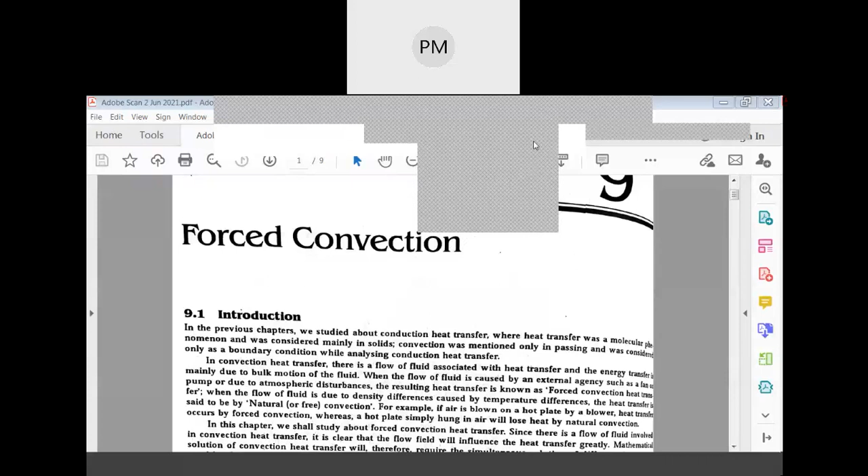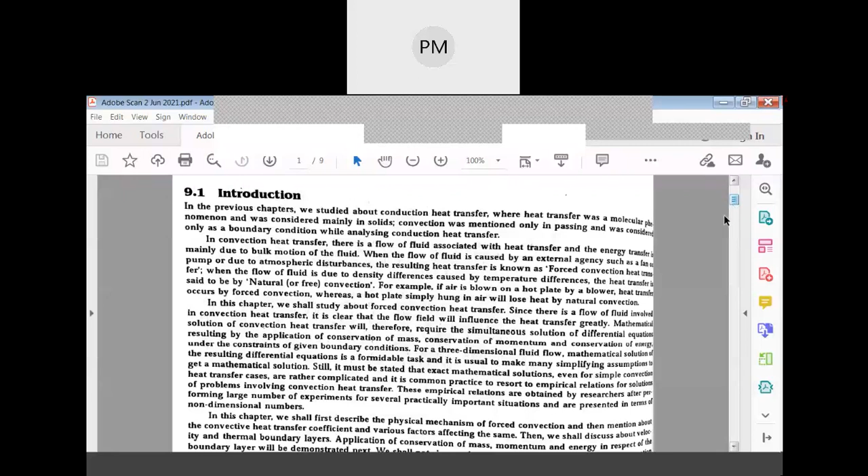So what is convection? Convection is a mode of heat transfer that takes place between a solid surface and a fluid. Here in convection, the fluid will have bulk motion flowing over the entire surface. Heat will be transferred from the surface to the fluid, or vice versa, depending on which has the higher temperature. If the surface temperature is higher, heat transfers from the solid surface to the surrounding fluid. If the fluid temperature is higher, heat transfers from the fluid to the surface. Heat always transfers from higher temperature to lower temperature.

Now, in convection there are two types: forced convection and free convection. In forced convection, we use external devices like fans, pumps, or blowers to increase the velocity of the fluid flowing over the surface. If you increase the velocity of the fluid, you increase the heat transfer, because more fluid flows across the surface and more heat is absorbed by that flowing fluid. Heat transfer is greater in forced convection.

Whereas in free convection, the bulk motion of the fluid takes place due to the density difference caused by temperature.

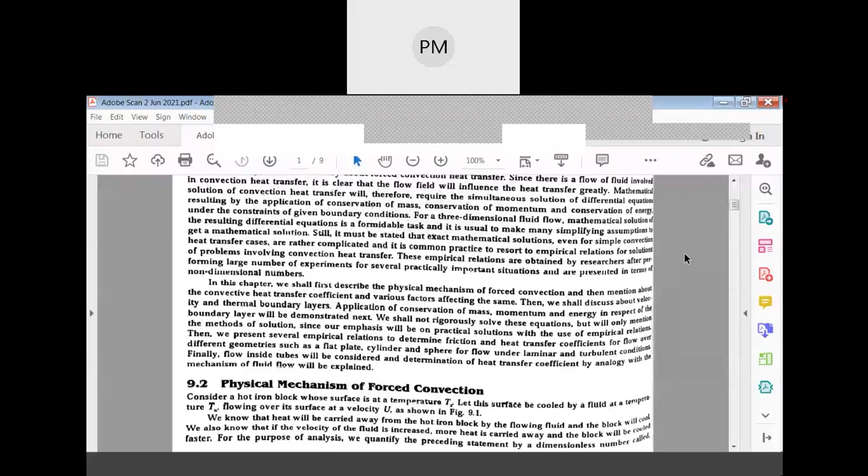For example, let us take a hot iron block which is hung in a room. If you just keep it in the air, the fluid surrounding that hot block will come in contact with it, and the temperature of the air increases. When the temperature of the air increases, its density comes down, and the hot air will try to move upwards. Again, cold fluid comes in contact with the hot block, absorbs heat, and its density decreases. Whenever density decreases, the fluid starts rising upwards. In this way, natural convection takes place.

Understood? Forced convection and free convection. In forced convection, we use external devices to increase the velocity of the fluid, thereby increasing heat transfer. Whereas in free convection, the bulk motion of the fluid takes place due to density difference. When the fluid comes in contact with a hot block or hot surface, it gets heated up and its density decreases. As the density decreases, the fluid rises upwards, and colder fluid with higher density comes in contact with the hot surface.

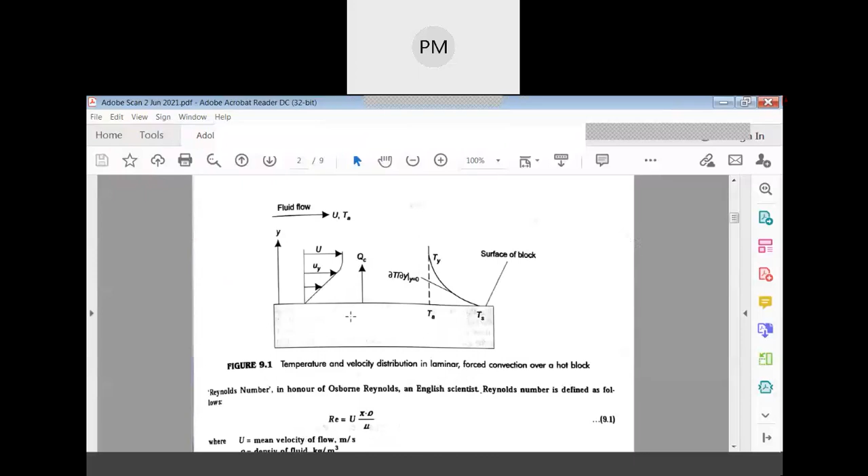Next, the physical mechanism of forced convection. First we will start with forced convection, then go to natural convection. Let us consider a hot block over which fluid is flowing. As the velocity is increased, more quantity of fluid flows across this hot surface, and more heat is transferred to that fluid.

This velocity is quantified in terms of a dimensionless number known as the Reynolds number, given by rho into u into x divided by the dynamic viscosity, where rho stands for density, u stands for velocity, x stands for characteristic dimension, and mu stands for dynamic viscosity.

So you should know the units also. Rho is the density, and its unit is kg per meter cube.

U is the velocity, in meter per second, and x here stands for characteristic dimension. This will depend on the geometry whichever you are using. If you are using a flat plate, then characteristic dimension will be the length of that flat plate.

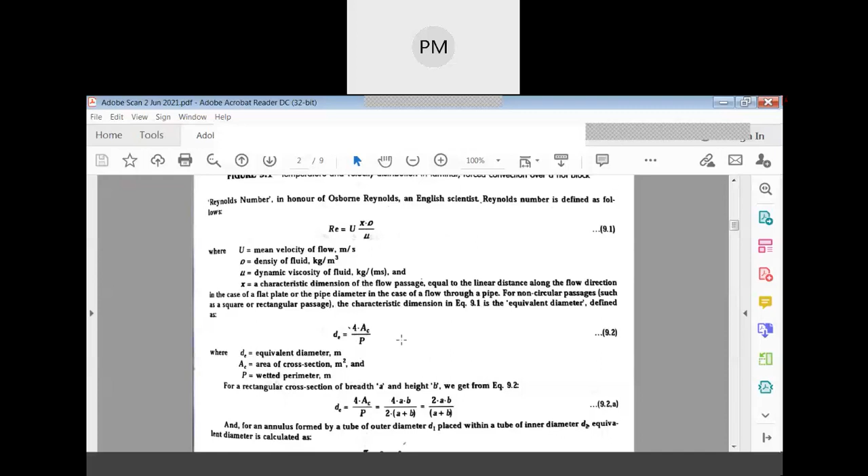Equivalent diameter we are going to use whenever it's a non-circular passage. If it's a flat plate, the characteristic dimension will be the length of the flat plate. If it's a circular pipe, diameter will be the characteristic dimension. If it's a non-circular passage, we use equivalent diameter, given by 4 times cross-section area divided by the perimeter. Suppose you take a rectangular cross-section having breadth A and height B, the equivalent diameter is given by 4 times cross-section area by the perimeter.

What is the cross-section area? If it's a rectangular cross-section, the cross-section area is breadth into height, sometimes we say length into breadth. Here we have taken breadth into height, AB - one side dimension is length A, another side dimension is length B. Then 4 times length of A into length of B divided by perimeter. What does perimeter mean?

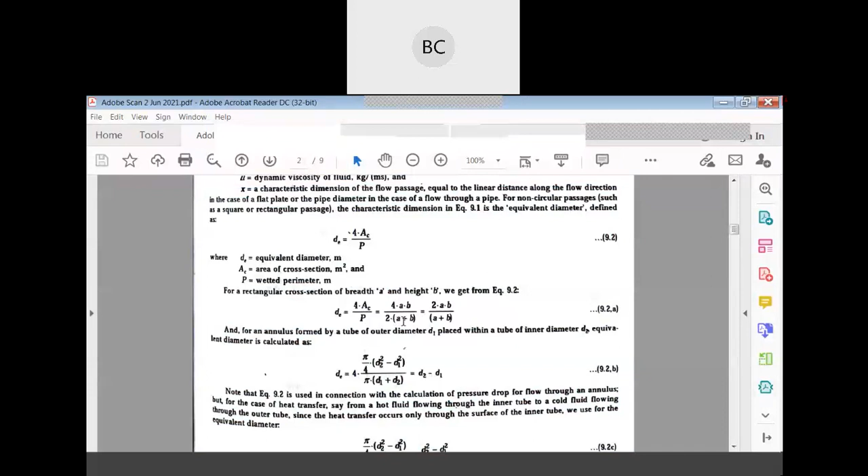Okay, if you just simplify, it will become 2a times b divided by a plus b.

Now, if you want to find what is the equivalent diameter formed by the annulus of the outer diameter and inner diameter. Suppose there are concentric pipes - that means one pipe inside another pipe, which we call concentric pipes.

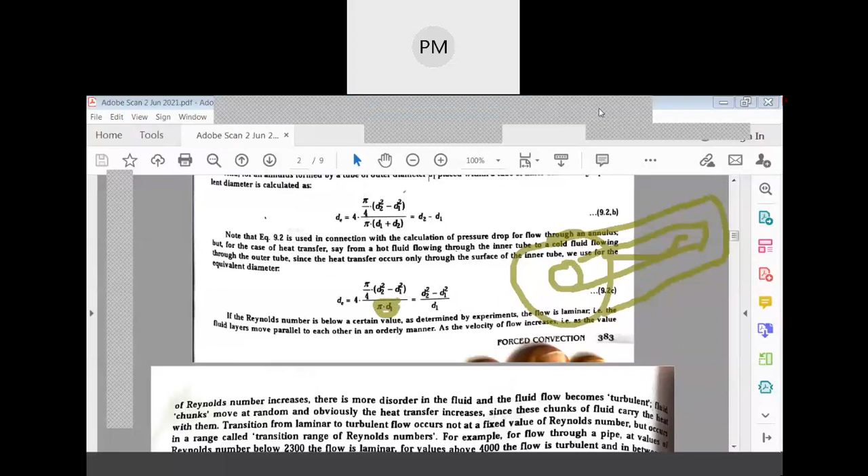Then the equivalent diameter is given by 4 times. We have to take the cross section area of the outer pipe minus the cross section area of the inner pipe, that is the difference. Then here, heat will be transferred from the inner pipe surface, that is why we have taken only pi times d1. If you simplify this, you get d2 square minus d1 square by d1. This is how you find the equivalent diameter.

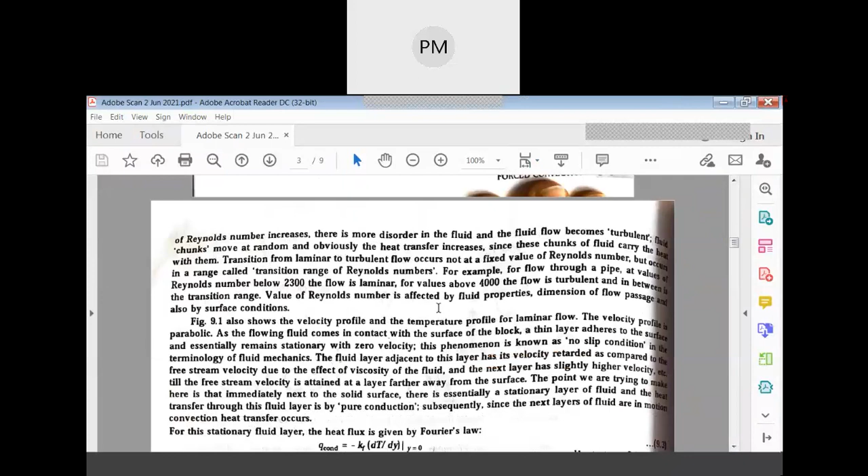Now regarding Reynolds number - if you take a circular cross section, just flow through a pipe, then for Reynolds number below 2300 the flow is said to be laminar, whereas above 4000 the flow will be turbulent flow.

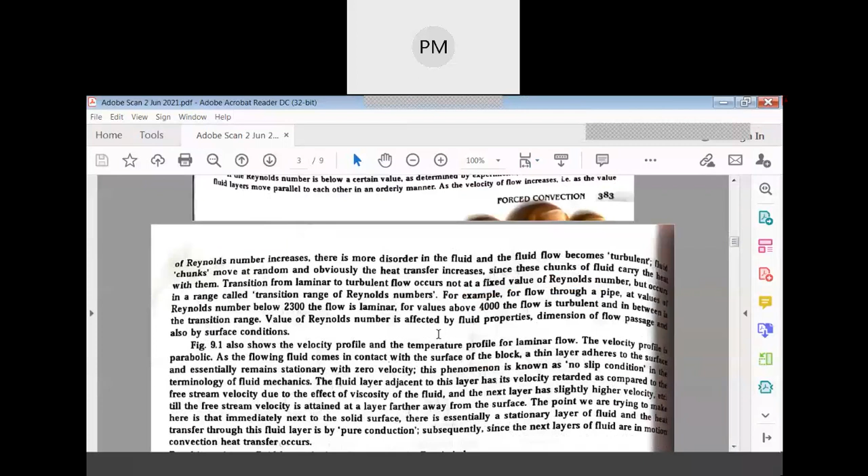Laminar flow and turbulent flow you already have come across in fluid mechanics. What do you mean by laminar flow? Laminar flow means the fluid will be flowing such that the fluid layers will be parallel. If you check the fluid layers, they will be flowing in a parallel direction, whereas in turbulent flow the chunks of fluid will be moving in a haphazard manner. That is turbulent flow - the fluid layers will not be parallel, it will be flowing in a haphazard manner, meaning you cannot find the exact direction of that fluid. So that is turbulent flow.

So if you take flow through a pipe, for a Reynolds number of 2300 or below, the flow is said to be laminar, and if it is above 4000, the flow is said to be turbulent. In between this value, that is between 2300 and 4000, the flow is a transition region.

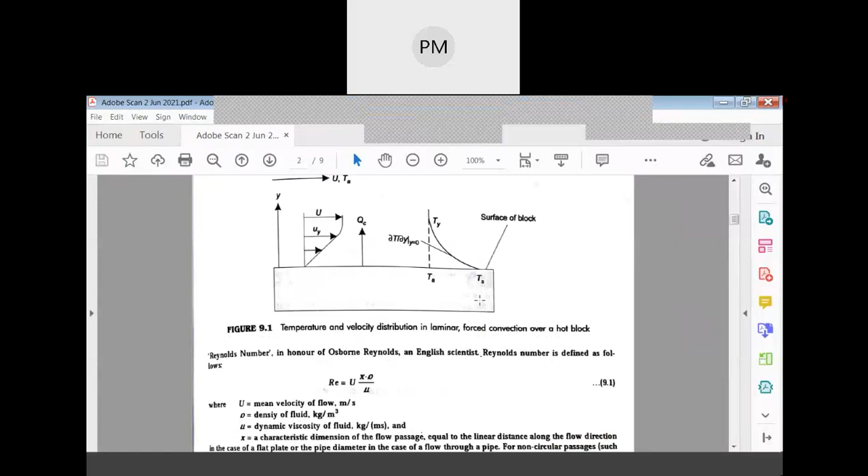Now here I have shown you the hot block. There is a hot block over which the fluid is flowing at a velocity u, and its temperature is Ta, and this hot block's temperature is Ts, its surface temperature is Ts.

See, when the fluid flows over this hot block, the fluid just above this hot surface will have its velocity 0. This is important - the fluid which is just flowing above this hot surface will have its velocity 0, or we can say that fluid layer will be having 0 velocity, or it will be a stationary one.

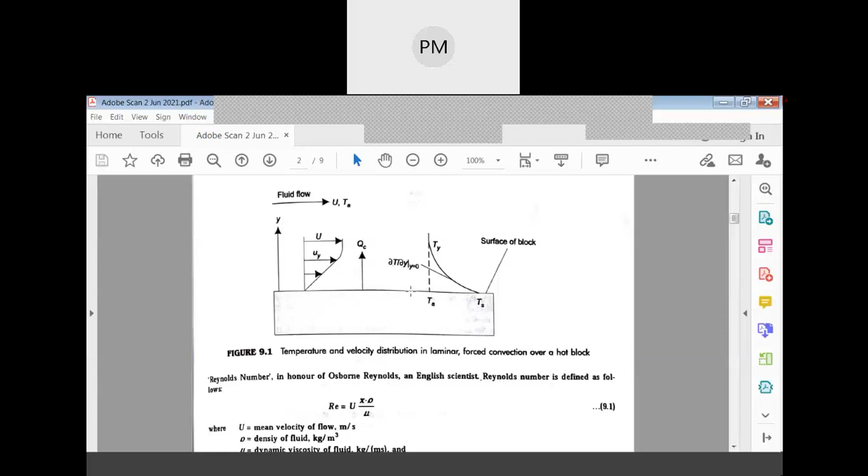Which fluid? The fluid just above the surface of this block - we call such a condition the no slip condition. Why? Because the fluid layer which is just above the surface of this hot block will adhere to this surface. Adhere means it will be attached to that surface. One layer of the fluid will be attached to this surface, and as a result its velocity will be 0, or we can say that fluid layer is stationary, and this condition is known as no slip condition.

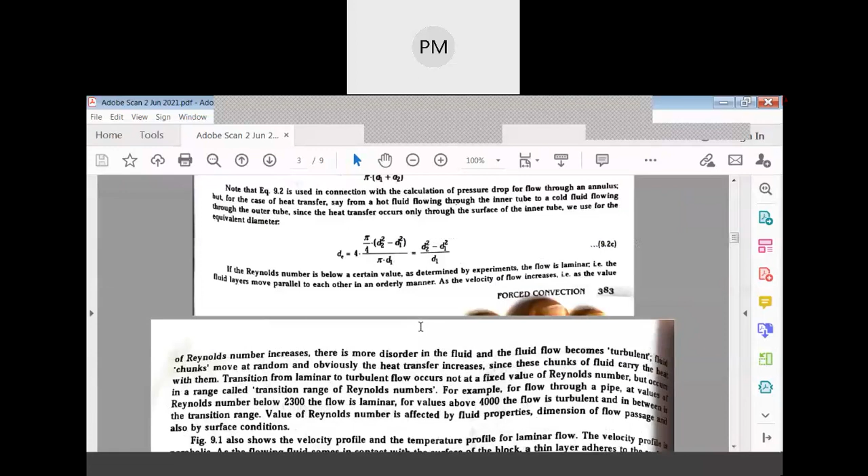Now, if you take the next adjacent fluid layer, that fluid is attached to the surface under no-slip condition, whereas if you take the next fluid layer, it will have some velocity, but that velocity will be less.

And if you take the next adjacent layer to this fluid layer, its velocity is increased slightly, and the velocity will increase in the vertical direction till it reaches the free stream velocity of that fluid, which is U.

I will explain once again. When fluid flow takes place over this hot block, one layer of fluid just above the surface will adhere to that surface. That fluid layer attaches to the surface and will have zero velocity. This condition is known as the no slip condition.

The next layer of fluid above the first layer will have some velocity, but that velocity is less. The next layer will have slightly higher velocity compared to the layer below, and this velocity keeps increasing. This velocity profile is parabolic in shape - in the vertical direction, the fluid velocity is zero at the surface and slowly increases. This is due to the viscosity effect.

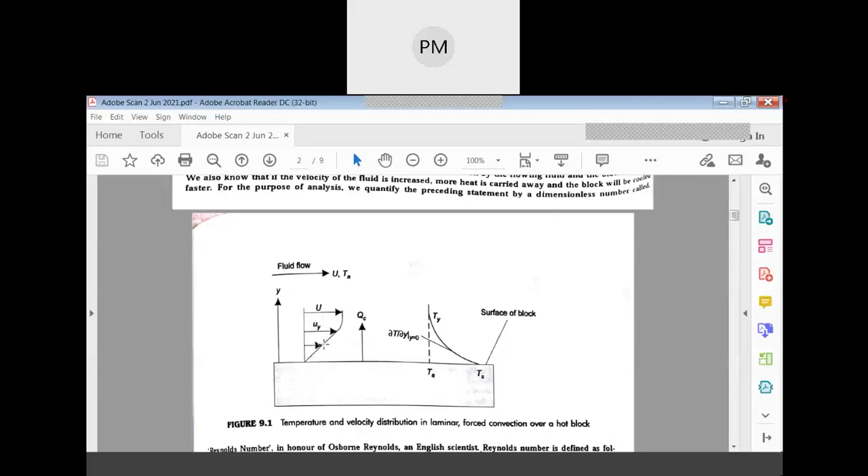So this velocity gradient means the velocity is zero at the surface of the block and the velocity is going to increase slowly till it reaches the free stream velocity. We call that the velocity gradient.

Now, if you take temperature, the temperature of that fluid which is attached to the surface will have Ts.

It will have Ts, and the temperature of that fluid is going to decrease as you move in the vertical upward direction, until it reaches the ambient temperature, Ta.

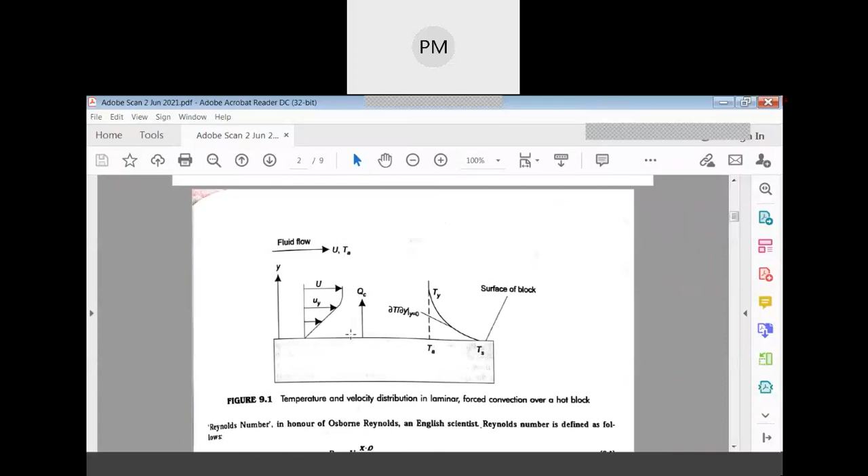This is the first layer, which is attached - adhered means it is attached to that surface. So its velocity is zero velocity. That fluid is actually not moving. Only the fluid above that surface, above that first layer, will have velocity, whereas the first layer of fluid will have zero velocity, and if it is zero, there is no bulk motion of the first layer.

So the heat transfer to that first layer of fluid is by conduction, and for conduction the heat transfer is governed by Fourier's law, which is given by heat flux.

Heat flux - what does it mean? What do you mean by heat flux? It is nothing but heat transfer by area, correct? Now heat flux is nothing but Q by A.

This is nothing but heat flux, Q, small q. So this should have been actually capital Q is equal to minus K into A. Area has been taken to the left hand side, then it is capital Q divided by area, which is nothing but heat flux, small q, which is equal to minus Kf into dt by dy.

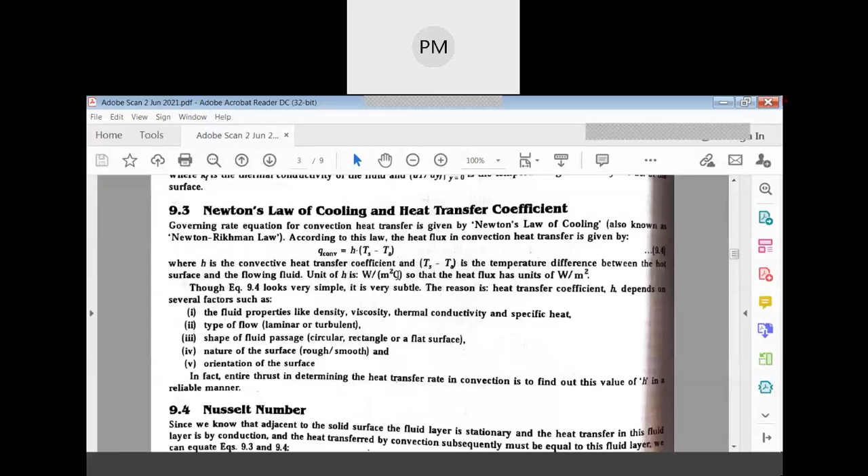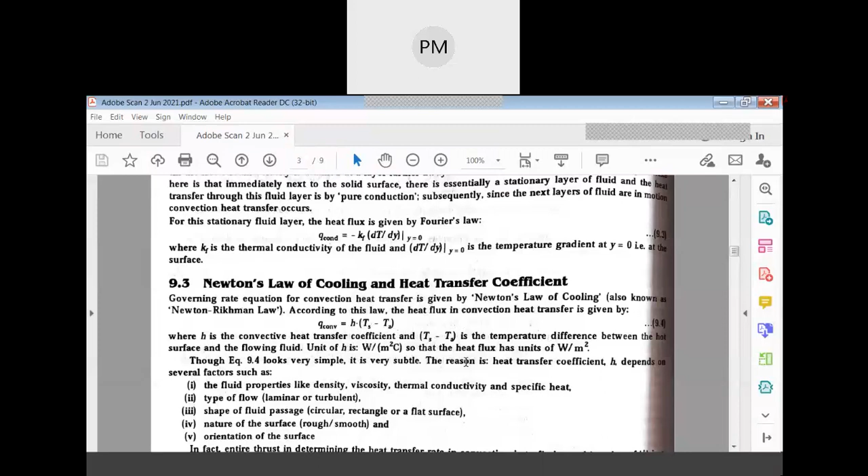Now heat transfer is governed by what? Which law? Newton's law of cooling, isn't it. Newton's law of cooling is the governing law for heat transfer by convection. So according to this law, Q convection is equal to H into Ts minus Ta, where H represents convective heat transfer coefficient and Ts minus Ta is the temperature difference between the hot surface and the flowing fluid.

Okay, here you have come across H. It is given in watts per meter square Celsius or watts per meter square Kelvin, we can say. That is the unit for heat transfer coefficient.

And I already have told you, again I am going to tell you, heat transfer coefficient - even though this equation looks simple, the heat transfer coefficient depends on so many factors. It depends on fluid properties like density, viscosity, thermal conductivity, specific heat - it depends on all of these. It depends on type of flow, that is laminar flow, turbulent flow, also geometry - whether it's a circular shape, rectangular shape, or any flat surface or some non-circular passage. Also it depends on the smoothness of the surface, as well as orientation, whether it's horizontal, vertical, or some inclination.

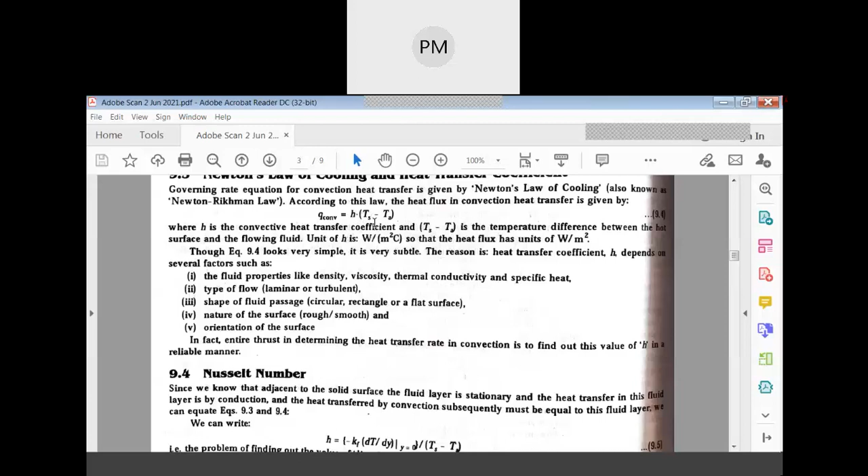So the value of H is not an easy phenomena. Actually what we are taking, this H is the average heat transfer coefficient. This heat transfer coefficient will vary actually from point to point. We are going to take average heat transfer coefficient, and we can substitute it in this equation. So finding the value of H is not an easy task.

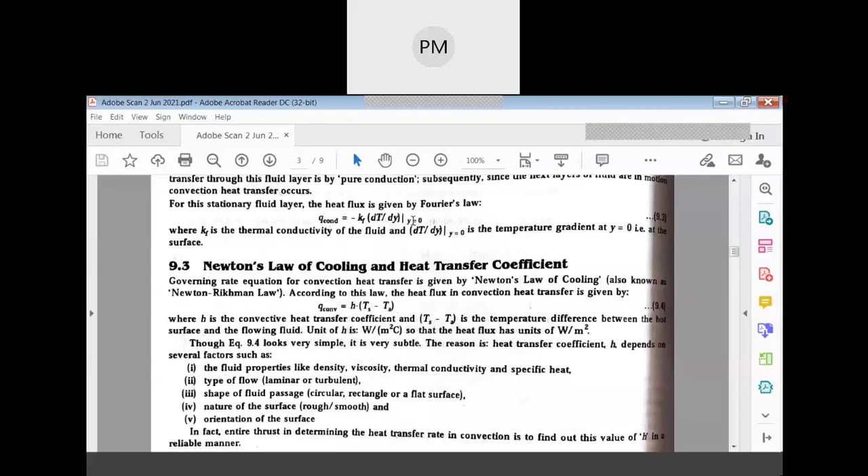Now see, whatever heat transfer to the first layer of fluid by conduction is equal to heat transfer to the subsequent layers by convection. So this Q conduction is equal to Q convection. You can equate these two equations, that is minus Kf dt by dy at y equal to 0 is also equal to H into Ts minus Ta.

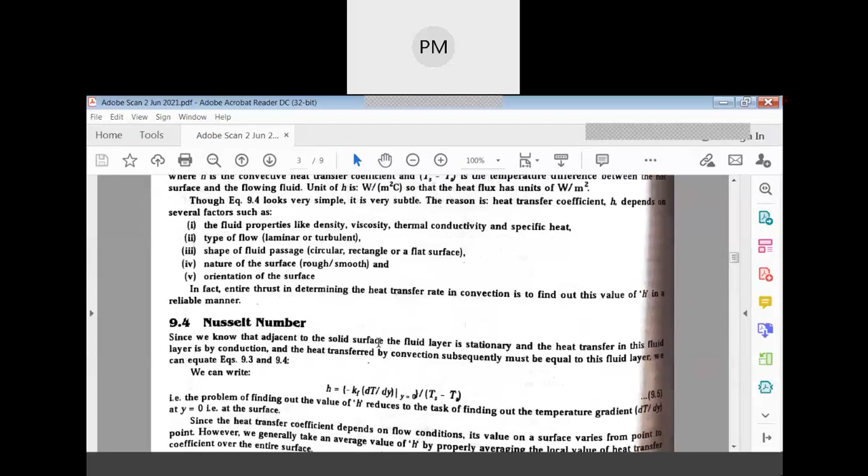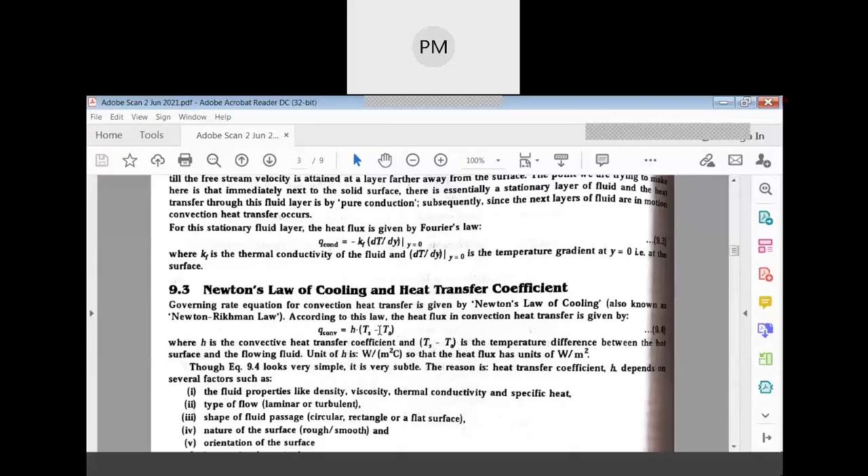How did you get this equation? You equate these two equations on the right hand side - whatever is there, make them equal, because whatever heat conducted to the first layer is equal to heat convected to the subsequent layers. So you can equate the right hand side of these two equations. And what is H now? That should be equal to minus Kf dt by dy at y equal to 0 divided by Ts minus Ta.

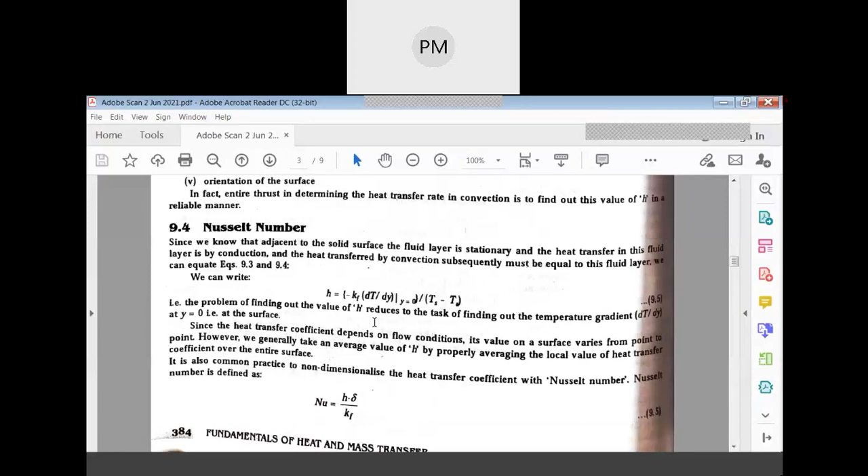Right? So when you want to find the value of h, you have to find the temperature gradient. Then you can find what is the value of h.

The value of h depends on flow conditions and so many other factors, so it will vary on the surface from point to point. If you take a flat surface or some length of the plate, that value of h actually varies from one point to another. What we will do is take the average value of h by averaging the local value of heat transfer coefficient over the entire surface.

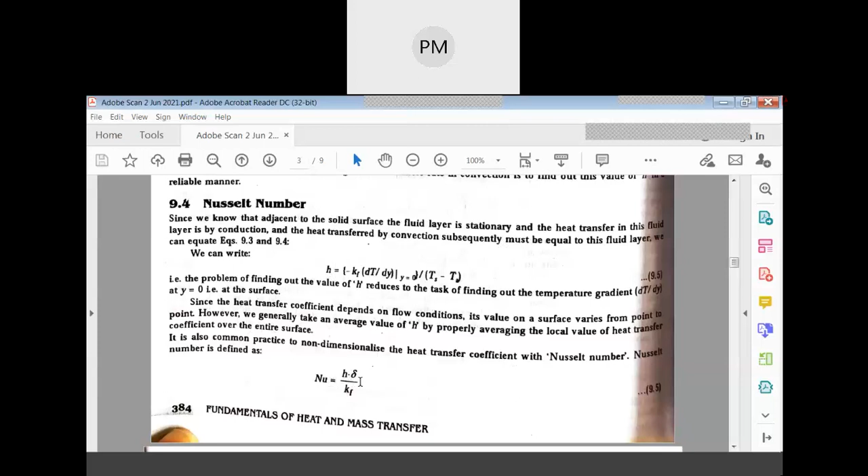This heat transfer coefficient is non-dimensionalized using a number known as the Nusselt number, given by h into delta by kf. Here h stands for heat transfer coefficient and delta is the characteristic dimension. It depends on geometry: for flow over a flat plate, we take the length of the plate; for a circular cross section, the characteristic dimension becomes the diameter d. And kf represents the thermal conductivity of the fluid. This is very important - kf represents thermal conductivity of the fluid.

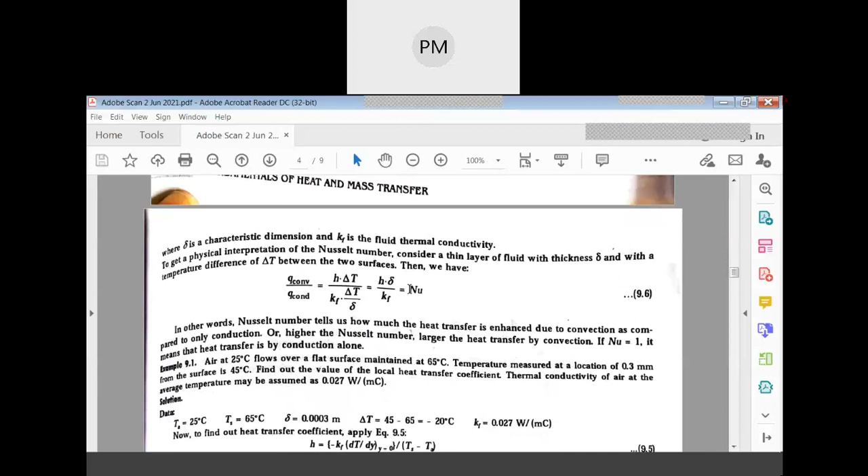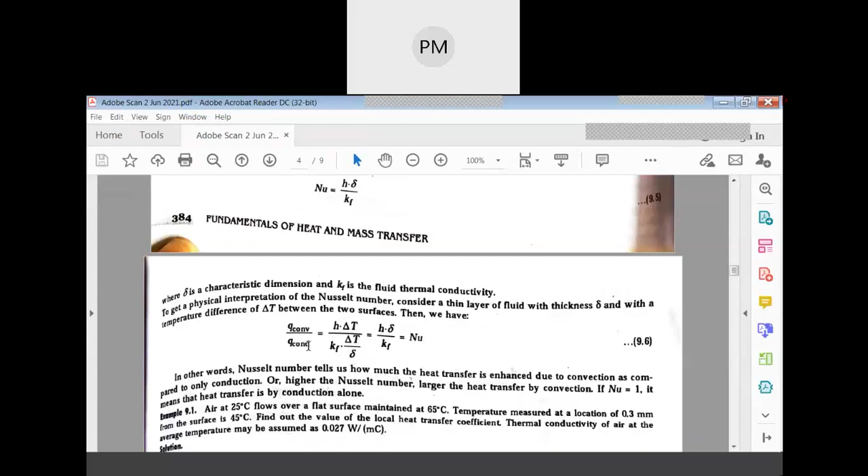Now, Nusselt number, h into delta by kf, I can write as h into delta T divided by kf by delta. So h into delta T actually represents heat transfer by convection, or heat flux - you can add area to numerator and denominator. Heat transfer by conduction is nothing but k into delta T by thickness, or characteristic dimension. So Nusselt number is actually heat transfer by convection divided by heat transfer by conduction, and that is the physical significance of the Nusselt number.

We have done one problem here. Let us try to do this problem.

There is air at 25 degrees Celsius flowing over a flat surface maintained at 65 degrees Celsius. Temperature measured at a location of 0.3 mm from the surface is 45 degrees Celsius. Find out the value of the local heat transfer coefficient. Thermal conductivity of the air at average temperature may be assumed to be 0.027. So air is at 25 degrees Celsius ambient temperature, there is a flat surface having a temperature of 65 degrees Celsius, and temperature measured at a location of 0.3 mm from the surface is 45 degrees Celsius.

Now what they have asked is to find the value of local heat transfer coefficient - the heat transfer coefficient at that location, the 0.3 mm location. That means you have to find the heat transfer coefficient at a location of 0.3 mm from the surface, where temperature is 45 degrees. Surface temperature is 65 degrees. The location thickness is 0.3 mm, which in terms of meters is 0.0003 meters. Delta T here: 45 minus 65 is minus 20. Thermal conductivity of the fluid is also given.